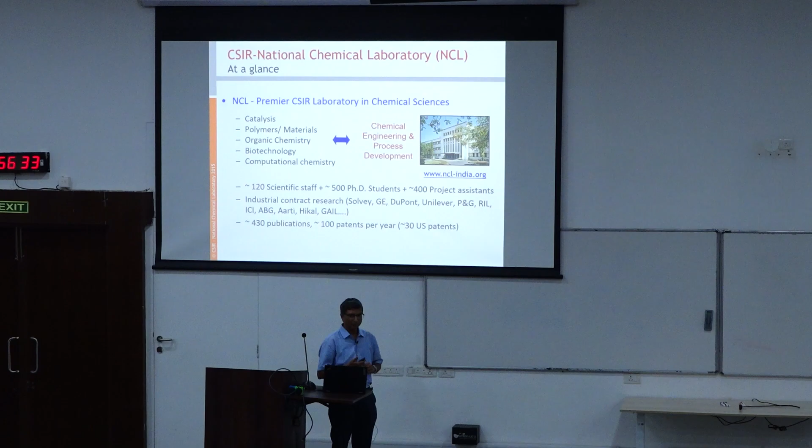Size does not matter. So, we publish a lot, file a lot of patents also. So, there are a lot of people who do a lot of basic research and a lot of people who do a lot of applied research. It is a lab where things are balanced properly, because many times you just can't run around and repeat the same reactions again and again, but you would also like to spend some good time on why it is happening, why you are not getting the required kind of results. So, there are a set of people who just do that part, they do not get into application, but they know why some reactions happen that way.

So, in our group we basically do a lot of training programs, and one major part is on continuous processes. Now, why continuous? It is easy because our digestive system is continuous, we think continuously. When we want to travel from any part in Ahmedabad to any other part, we do not want to have traffic jams, we do not want to have speed breakers, we do not want to have signals, we would like to travel continuously, but that is the case with every city. Fortunately, our heart works continuously, kidney works continuously, it is all continuous because it is efficient.

And so, when so many examples are around, then why should chemical synthesis also not happen in continuous mode? It should be a continuous process. Not everything need be continuous, but wherever required it has to be continuous. There are a lot of advantages of that, I will come to those points a little later. And it is not that we do not know continuous things, we eat lots of cookies, breads, biscuits, everything which is manufactured in continuous mode. The assembly line in the automobile industry is continuous, pharma tableting happens continuously.

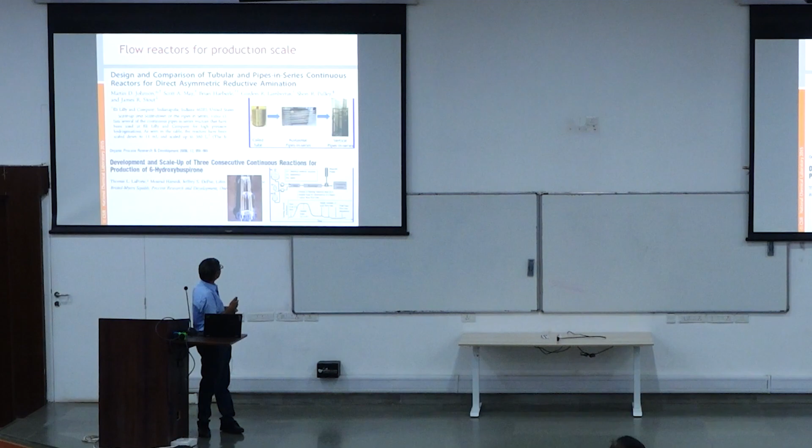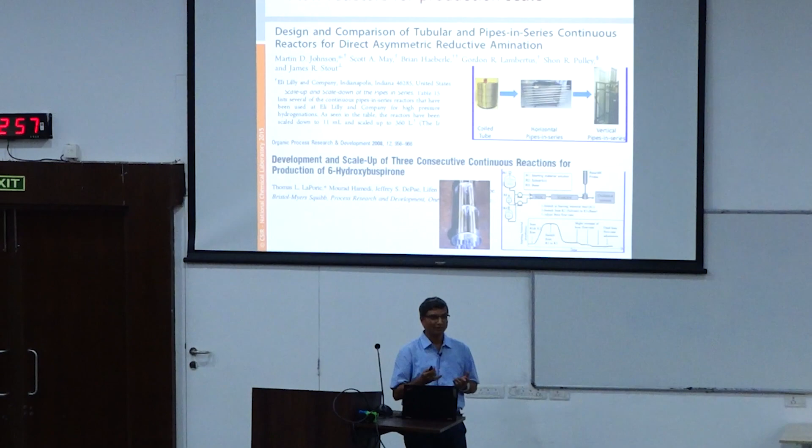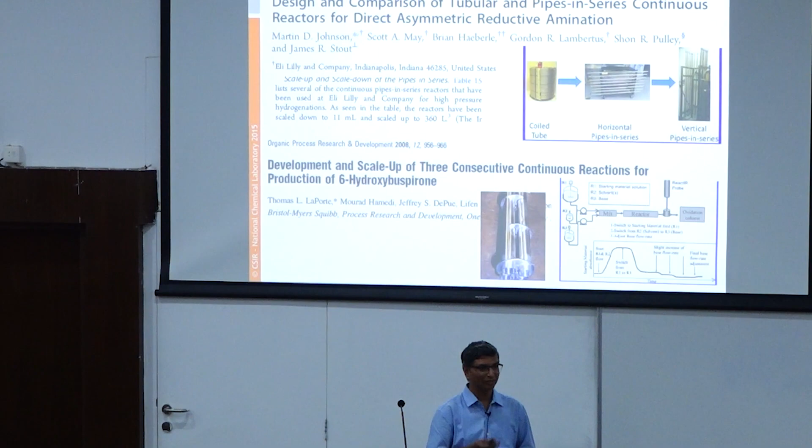So, many such successful examples have been shown, and many such things exist in the literature and at commercial scale, where people have gone to really large scale reactors, like reactors with a capacity close to 360 liter volume, and the reaction time is 3 minutes. So, every 3 minutes 360 liters is processed. So, imagine the throughput for the entire day, and that 360 liter reactor actually sits on this kind of a podium. It is a really compact one, but offers very high heat transfer area.

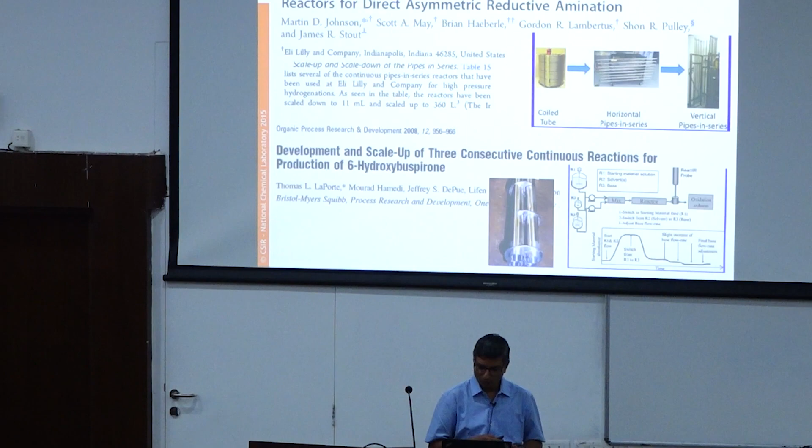So, over time, a lot of industries have gone into this, a lot of good publications came out, and after that the European chemical industries came out with a plan to transform the way they make chemicals in different segments, like R&D. They thought that by 2004 the R&D of almost all European chemical industries would have flow reactors, then screening would happen, then industry would adopt quickly, biotechnology transformations would happen, and then fine chemicals, energy production and mass chemicals. This was quite ambitious, because the entire timeline and roadmap was made by chemists without realizing the many engineering challenges they were going to face. Eventually it took quite some time, and probably they are still somewhere here.

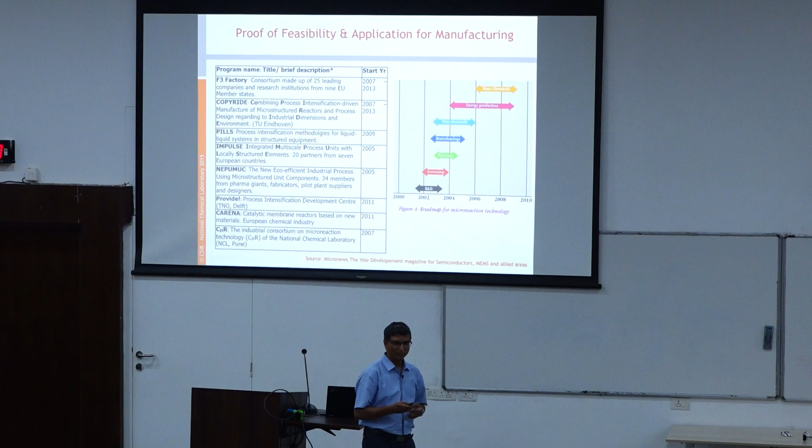This is happening in the US, energy production by companies like Velocys at very large scale. There is a company called Atmonia in Iceland; Atmonia stands for atmospheric ammonia. They do ammonia synthesis at atmospheric temperature and pressure, rather than the Haber-Bosch process, which is at 250 bar and very high temperature, almost 400 degrees centigrade. So, they use nitrogen from air and hydrogen from water at room temperature to make ammonia. It's all a continuous process.

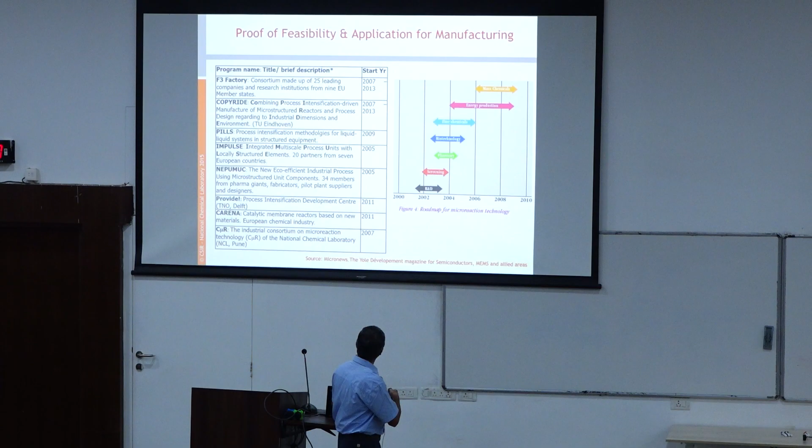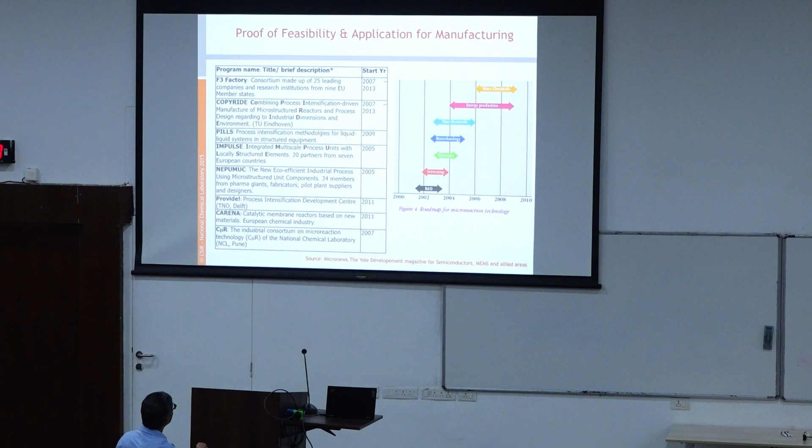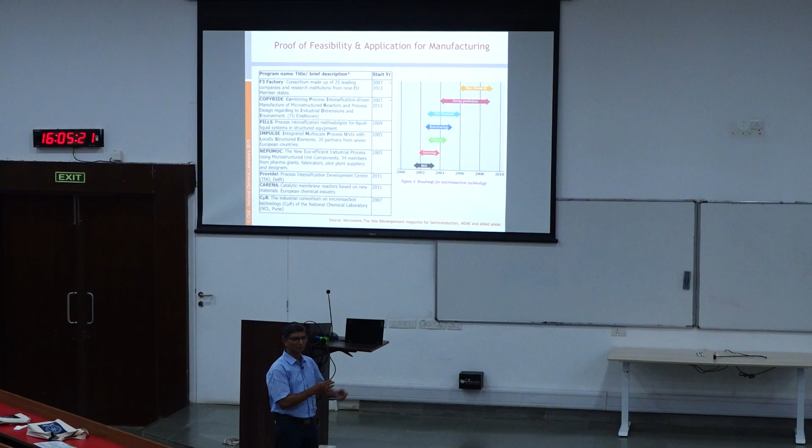Over a period of time, a lot of consortiums came out where the industries came together. It was not academia. Industries came together. For example, in this particular case, 34 members from pharma industries in France and some European companies came together to develop eco-friendly industrial processes. Similar is the case with IMPULSE, integrated multi-scale process units with locally structured elements, 20 partners from 7 European countries. So, industries came together to solve common problems, rather than one company solving a problem and keeping it to themselves, because, at least in India, people hop. So, you lose the process that way.

So, rather than that, the way pharma companies did, many years back there was a big program called LAZORE, L-A-Z-O-R-E. Each letter stands for one company, like L for Lupin, A for Aurobindo, Z for Zydus. So, these companies came together to solve one single problem of solvent recovery.

Because in pharma, solvents are used in large quantities in the end-stage chromatographic applications. They wanted to recover as much as possible. So they realized that there is no point in each of them individually spending a lot of time and energy on that. They all came together to form a consortium and solve the problem once and for all.

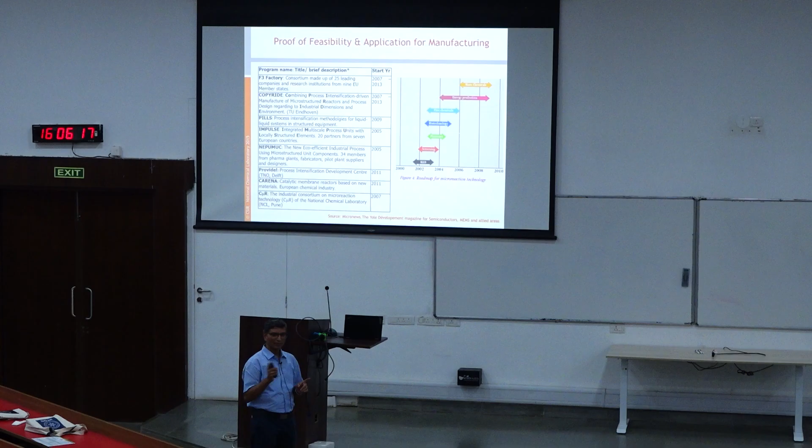In 4 years, there were 6 major solvents which they were using. This consortium solved the problem to recover all the solvents to 96% in one single go, and they informed everybody, and there was a technology partner who made sure that the plants were put in each of these locations. So I think that is what needs to be done. People do trust each other, and we also need to do the same thing.

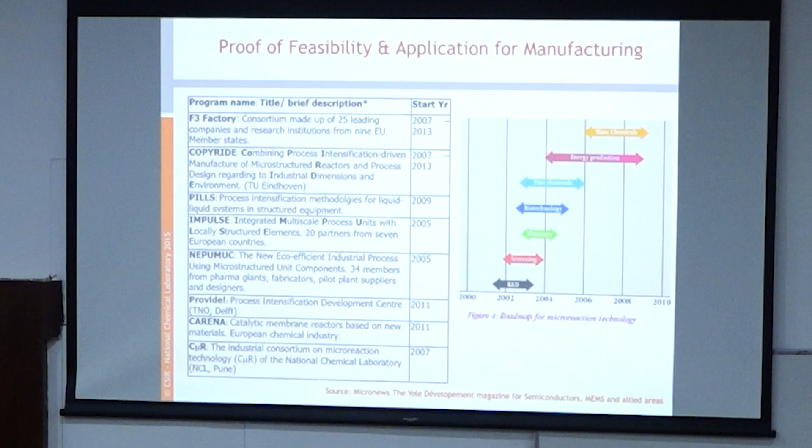In batch it does not matter, because conventionally a chemist will develop a batch protocol, hand it over to a tech transfer team who will try to follow exactly the same protocol without thinking much about it, and then it will be implemented at large scale.

But when you have processes where the reaction rates get enhanced significantly, like imagine you are doing a reaction at minus 40 degrees centigrade for 8 hours in a reactor which is 1 meter cube or 1 KL. Instead of that, if you do the same reaction at 0 degrees centigrade, what is going to happen? As per reaction kinetics, with every 10 degree increase, the reaction rate doubles.

So at minus 40 it needed 8 hours, at minus 30 it will need 4 hours, minus 20 2 hours, minus 10 1 hour, 0 degrees 30 minutes, and you keep going to 20 degrees and so on, you will come to a few minutes. But what is important here is that as the reaction time decreases, the amount of heat that gets generated is not going to decrease, it is going to remain the same.

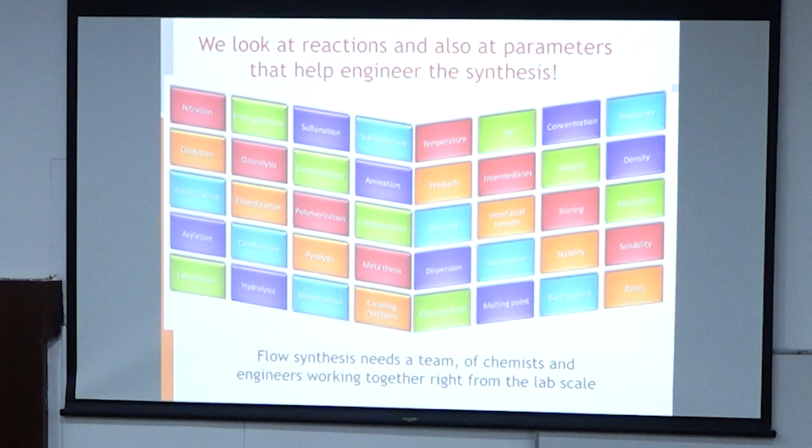So typically when we do a 5-day training course at NCL, we have a long, elaborate program. Day 1 is basics of reaction engineering and multiphase flow, because a lot of industries do gas-liquid and liquid-liquid reactions. Every day the morning half goes in lectures, and the second half goes in doing experiments based on what was covered in the first half.

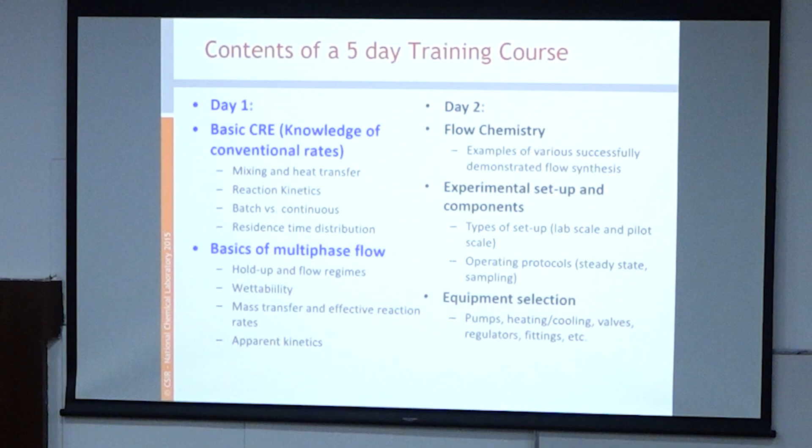Then the second day is on flow chemistry, various successful examples from the literature, and what kind of experimental setup is required for liquid-liquid reactions and gas-liquid-solid reactions. In the second half, people are given all the components required to assemble the setup. So each team assembles their own setup to carry out their own reactions. That is the way the second day goes.

The next day we cover a session on batch to continuous transformation. What should be the approach? How do you check the mass balance, energy balance, multiple case studies, what to avoid, and so on. And then we go for scale up. How do you scale this up? And in the afternoon they actually start doing the reactions. We will pick up one case, either nitration, diazotization, hydrogenation, or oxidation.

The fourth day is continuous separation, purification, and different special topics in chemistry. They continue to do more reactions in the second half. The fifth day is more like questions and answers. And since each team builds their own setup, when the setup does not work, they themselves know why it has not worked, because they assembled it, so they have to start from scratch again.

So this goes on for 5 days, and at the end of the 5th day we are sure, and they are also sure, that given any reaction they will be able to do it in their labs. And we give the setups to them so that they can carry them back, because one of the common excuses is "हमारे पास कुछ नहीं है" when they go back and priorities change, but then that does not happen.

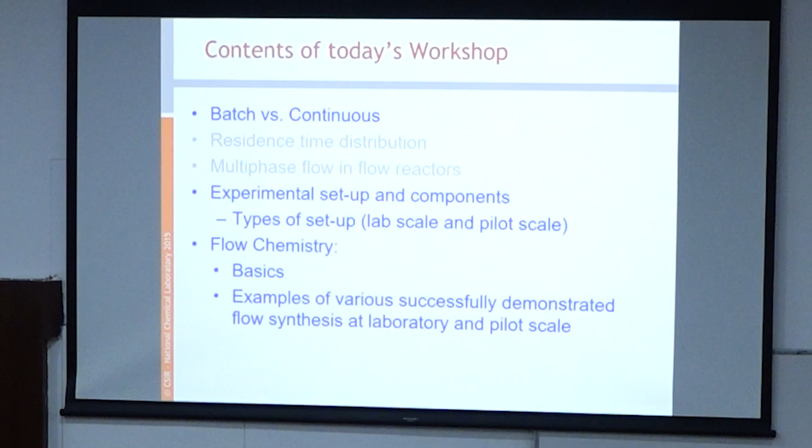We tell them what all they need at the end. What I am going to do today, I cannot conduct that whole thing. I am just going to give some information on batch versus continuous, why it is required, and then I will go back straight to this flow chemistry basics and some successful case studies. That will be better, and then my colleague Dr. Anil will cover some hydrogenations.

Okay, so before I begin, long time back in 2012 in OPRD there was one editorial by Professor Trevor Laird, who basically said that although a lot of APIs for the generic drugs are cheaper, 78% of them are actually manufactured outside India and China. Okay, 78% of the important ingredients for APIs are actually manufactured in these countries, UK, Germany, Switzerland, Italy, Canada, etc., where the labor and cost overheads are high. They can still compete on the cost because those syntheses are complex.

But when overheads and the labor cost in India and China also increase, will we be able to make even that remaining 22%? That is the question he asked. And then he says that only those who are the most innovative and have the most highly qualified and well trained chemists and engineers will be able to survive as the market demands lower and lower prices for generic drugs. So, it means that your prices will keep on falling; unless your technologies become better and better, you will not be able to meet the requirements at all.

And so he said that innovative low volume continuous processes might also be applicable in the generics field. Generics means the large volume pharma drug molecules. When he talks about that, it means that even for the other fine and specialty chemicals it is equally applicable. So, we have trained people from almost 60 different industries over a period of time; we are closely associated with many industries, we have trained their people indirectly, directly and so on. This is still a small subset of this thing.

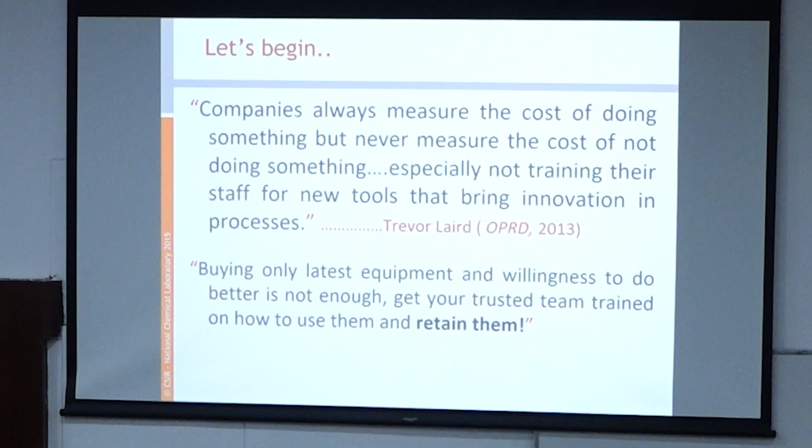Get your trusted team trained on how to use them and also retain them, because many times what we have observed, people who get trained on something very specific like to immediately write in their LinkedIn account that now I know this thing, and then they immediately jump to somewhere else, quite likely. So, for all the industry owners, this part is very important. How do you retain them? So, make a loyal team in your own groups and so on. So, I will just close the first part. This was just the introductory thing. I will stop this.

Around 15 to 20 minutes I will take this second part, and then is there a break in between or there is no break, right? Okay. You really want them to sit continuously for a long time? We will see. Okay, all right, fine.

Okay. So, let me begin with some basics of flow reactors, because I know that many of you have attended many conferences, you have seen the flow reactors in ACHEMA and CPHI kind of exhibitions. You also directly use some of these things, but since Professor Chinmay told me to have a basic training course kind of thing, I thought that this might be a very useful thing. I might skip some part of it without getting into too many details.

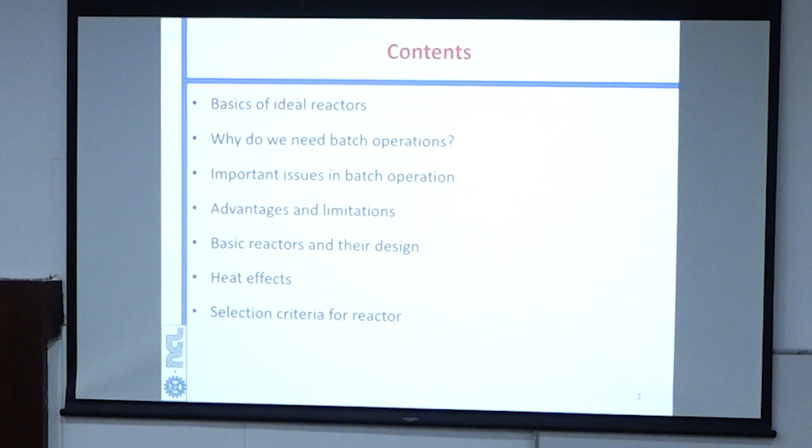Okay, what I will cover: basics of ideal reactors, why do we need batch operations, important issues in the batch operations, advantages, limitations, and then basic reactor design and why we should go for a continuous reactor. So, typically the batch reactors, I do not need to tell you, we do all cooking at our home in batch mode, whether we are making a cup of tea or any curry or anything, it is all batch.

And every day we know that the tea does not taste the same, but we forget that, we do not compare. But if we really have some kind of way by which we monitor the taste of a tea every day, you will get a wide distribution over a month almost every time you do it.

So, batch reactors are stirred tanks sufficiently large to handle full inventory of the complete batch cycle, and people typically want to produce as much as possible in a single reactor. Primary purpose is that in one single go you produce a large batch, so that your utility cycles also remain intact as per your requirement, and your manpower should match with your 1 or 2 or 3 shifts at the most. There are a lot of supply chain issues also related to that.

You also want to make sure that it is not just the reactor, but further separation, maybe distillation, filtration, washing, etc., are all coupled with each other. So, time cycles of each are set such that your batch time should match with what you really want, and that is a good thing. In general, industry has practiced and optimized that.

Continuous reactors are generally smaller than batch reactors, and they handle the product as a flowing stream. So, whether it is a stirred tank reactor where feed continuously comes, it is stirred, and the product comes out. Basically here the temperature is maintained at a given value, and you monitor that, because depending on that the reaction rate will be decided. In a plug flow reactor, it is like a tubular reactor, feed comes in and it flows, and at the outlet you get the product.

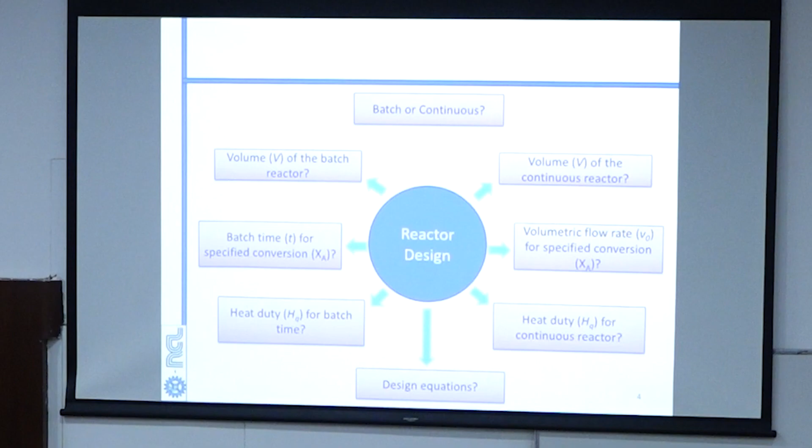So, with time the heat duty continues to change, while the continuous reactor is a steady state reactor, so nothing changes. So, to make a process or a reactor continuous, you need to know the heat of reaction. Irrespective of whether you want to operate a reactor in batch mode or continuous mode, heat of reaction is absolutely important, and then you use the design equations for that.

So, I do not need to say all these things because batch reactors are already known to you. Industry knows why you are using them, how you select the impellers and so on. So, I will just move on from this. This is one important part. Typically when chemical engineers study the design of a batch reactor in the undergrad and use the design equation, it is always about achieving a certain conversion in a given time, in a given volume and so on. But the economics of a batch reactor is very, very important.

So, assume that your reaction is just now over, and you have just emptied your reactor. This is an idle time in the reactor where you are washing the reactor, preparing for the next batch. Then the next is the preparation of the reactor. You are cleaning it from inside, using the air jet to remove everything from the reactor, checking utility temperature and so on. Then you are feeding one of the reactants and using utility to bring it to a certain temperature, and then you start adding the next reactant, either in semi-batch or batch mode, and the reaction starts happening.

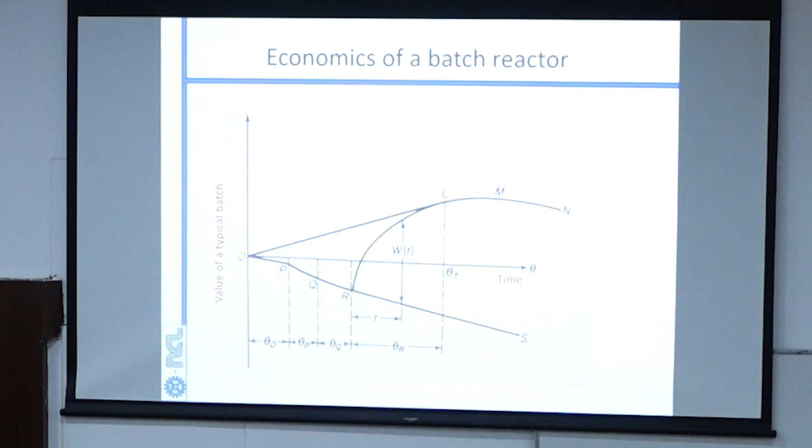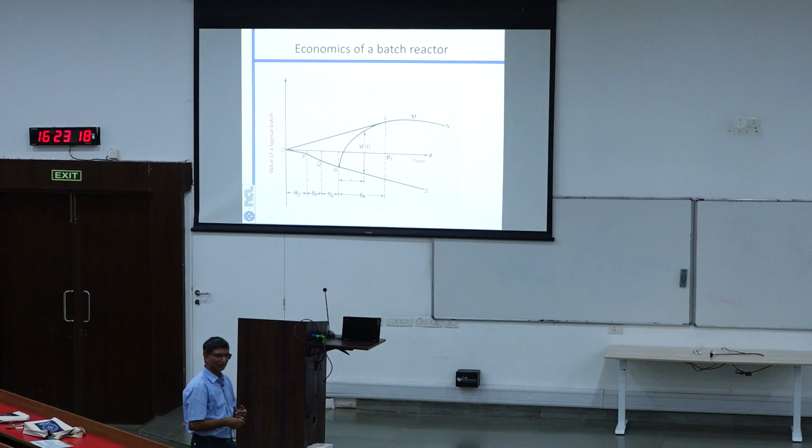Now, this particular line indicates how much money you are losing with time, because when it is idle and not being used, you are losing. It is like an aeroplane. When it is in the air, it earns money. When it is on the ground, it is not earning money. So when the batch is being prepared, the batch is empty, etc., you are not really earning. But as the reaction proceeds, you are earning money, and the time decides how fast you earn that money. The shorter the batch time, the faster you earn, and that depends entirely on the reaction kinetics. So anybody would like to reduce this time and this time also, so that you carry out as many batches as possible in a very short time.

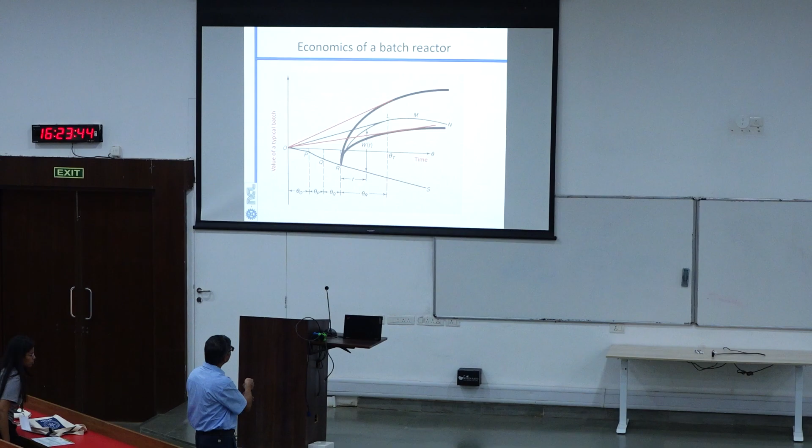So depending on your rate of reaction, because in a batch your heat transfer area is limited, you can't carry out a reaction very fast, it will have its own effects. It will generate side products, it will add a lot of cost to the separation and so on. So depending on how you carry out your reaction, the time where you should stop the reaction to get the maximum profit will be decided. Now all this is okay for a batch, people have been able to do this. But you can't really minimize this time; it is a huge amount of time you are losing every time between two batches.

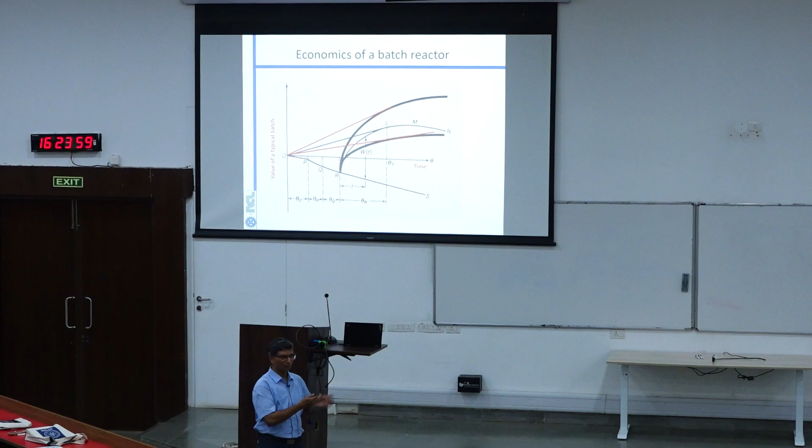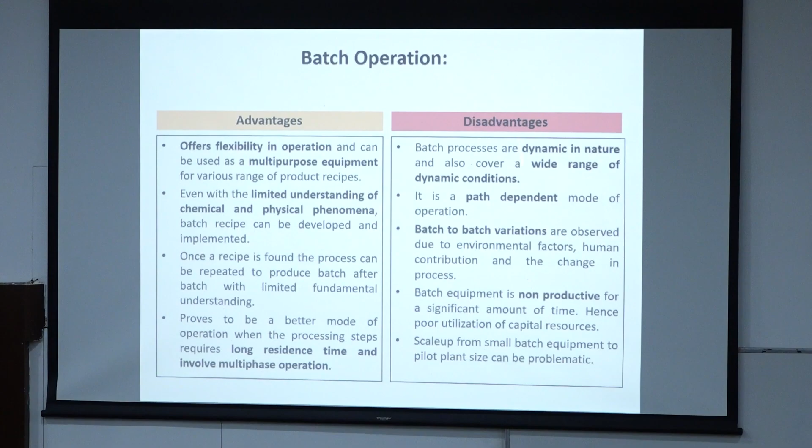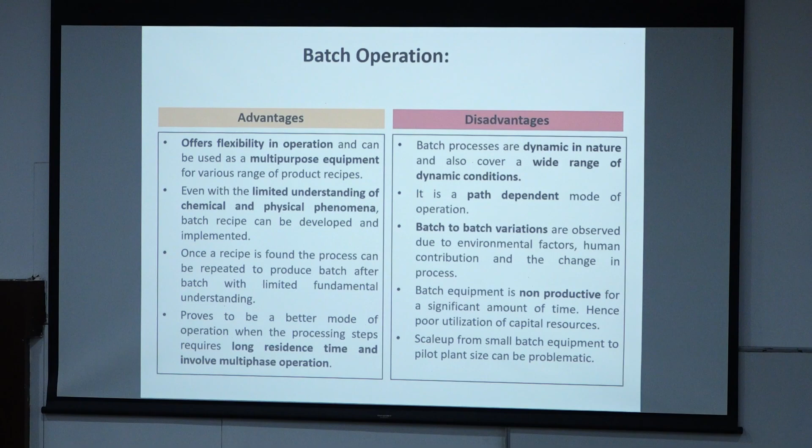Somebody might say, now I have 10 reactors, but the cycle has to be followed, you cannot bypass a cycle. There is some drain time, some preparation time, some cooking time, and then there is a reaction time. So you are losing time in general. So why do all these things? You better make it continuous. There are several advantages that you already know, and many disadvantages of batch reactors, but it is not that every reaction needs to be made only in continuous. There are several reasons for which batch is also necessary, and several reasons for which continuous has to be made. So how do you make that choice? That is what we will try to see.

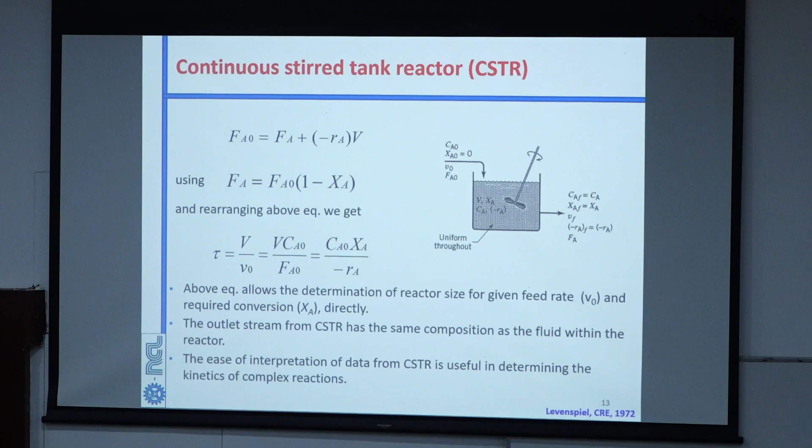So again CSTR, I will just skip some of these introductory parts. In a CSTR, as I told, the reactants enter and mix with the reaction mass; because they get diluted, the reaction rates are lower compared to a typical batch reaction, so it takes much longer to complete the reaction. To get the same reaction time as in a batch, it is necessary to have multiple CSTRs in series. If you have 4, 5, 6 CSTRs in series, this effect can be eliminated, so you get exactly the same time as in batch but still make it continuous. And then plug flow reactors: the reactant enters, product comes out, and what you manage is the temperature and good mixing. Depending on whether it is a liquid-liquid or gas-liquid reaction, you need the internal arrangements made in the reactor accordingly.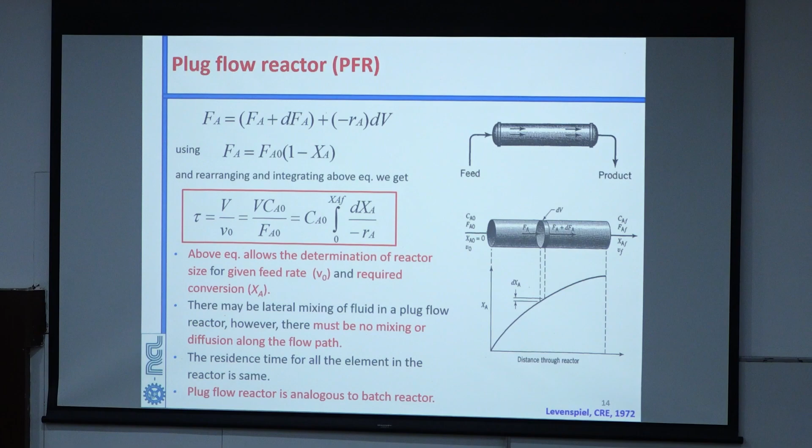Let me just skip this.

So when you do any kind of exothermic reaction, typically if you start the reaction at around 27 degrees centigrade feed temperature, and if you do a batch, suddenly the reaction temperature will rise to more than 90 degrees centigrade, because it's an exothermic reaction and you added both together. The reactants will react and the heat will come out. So within 1 minute it reaches close to 90 to 93%. It may go to completion also, but not in the desired manner. It will generate a lot of byproducts as well.

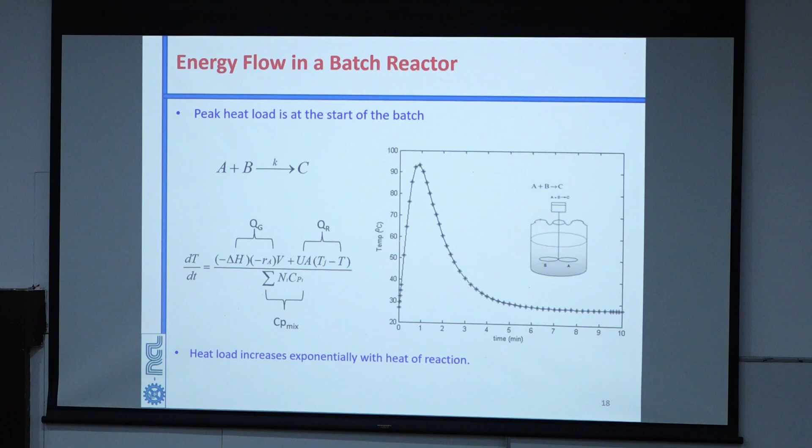But if you do a slow addition in the semi batch mode, which is a typical industrial practice, where you slowly add one of the reactants, then you go from 27 degrees to as much as 37 degrees centigrade in 10 minutes, and then slowly it will come to a lower temperature and the reaction will go to completion. In the previous case the reaction got over in about 5 minutes, but with a lot of byproducts. In this case it will take 30 minutes and you may get the desired product.

The only thing is that, to make sure the reaction temperature does not rise beyond this, you have to control time as well as temperature. So, operational cost increases.

In place of that, when you use a CSTR with proper configuration of the heating and cooling systems etc., it is possible to... let me skip this, sorry, I think I skipped one slide. Let me tell you one thing.

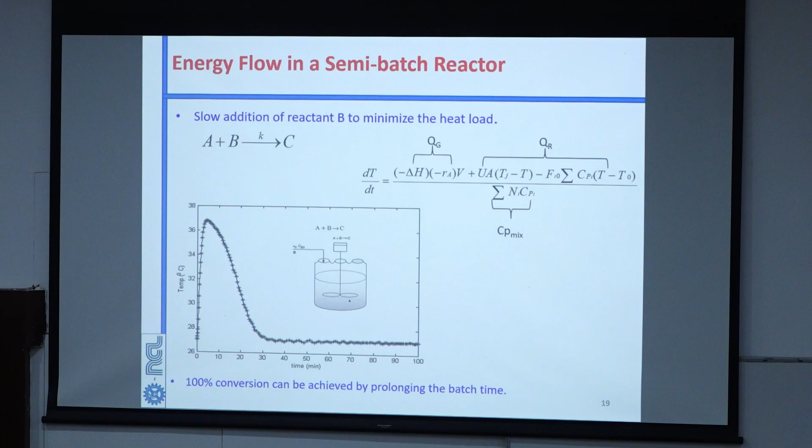If I do a CSTR, what will happen? You will have 3-4 CSTRs in series. Reactants together enter this reactor, the outlet goes to the next one, then the next one. The temperature can be maintained at the required 30, 35, 50, 55, whatever is required, and you still get what you want. So you are able to control the reaction temperature properly. Only thing is that your volumes will increase because your heat is getting distributed. You are not doing it at one location, but adding the reaction mass at different locations.

Let me go to this part here. Now, comparison between a CSTR and plug flow reactor. This is something very fundamental. Concentration in a CSTR is uniform throughout because you are stirring the entire mass, so the reaction rate is similar everywhere. On the other hand, in a plug flow reactor, the concentration changes along the length of the reactor because initially at the inlet the concentration is very high.

As the reactants move, the concentration decreases, so your rate of heat generation also decreases, and your product concentration increases. For a CSTR, concentration in the reactor is the same as the outlet. In a plug flow reactor, high concentration at the inlet, low concentration at the outlet. In the CSTR the rate is uniform in the entire reactor; in the plug flow reactor the rate changes with location.

In the CSTR the heat duty, the rate at which heat is generated, is uniform in the reactor. In the plug flow reactor, the heat duty decreases along the length because more heat is generated at the inlet where concentration is high, and it decreases toward the end. So whenever you design a reactor, whether CSTR or plug flow reactor, the most important thing required is reaction kinetics, which nobody measures.

I have rarely seen any industry measuring reaction kinetics, finding the rate constant and doing the design, except for some pharma and some fine and specialty chemicals for very large scale manufacturing. Otherwise, nobody does; you replicate what is successful in the batch at the lab scale.

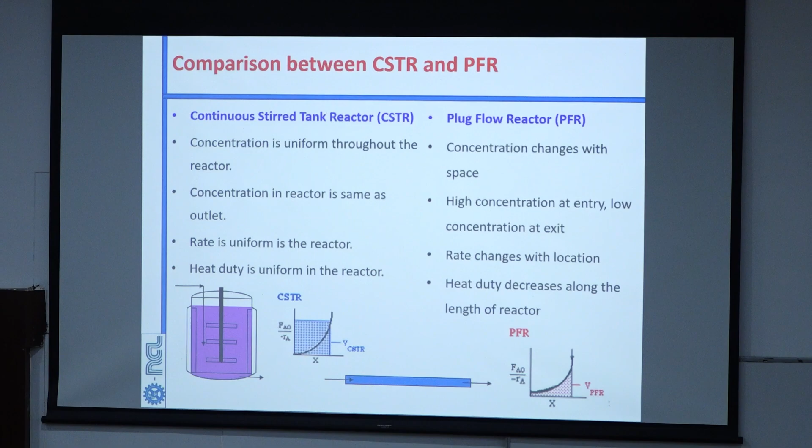So, there are a few specific advantages and disadvantages of both. From an operation point of view, in batch the concentration of materials changes over time. In a continuous reactor, at any point of time you take a sample from a CSTR, it is always the same, or in a plug flow reactor, right? From a given location you take out a sample, it is always the same because of steady state. Type of material: batch can handle all kinds of materials. For continuous reactors, it is easier for material which flows.

Then type of reactions: in batch, you have to slow down the reaction. You can't afford to do heavily exothermic reactions in a batch. In continuous reactors, due to small volume, fast exothermic reactions can be handled. Mixing: due to large volume, mixing throughout the vessel is very poor, because you need to have the right combination of impellers. That is also one more thing.

Typically in industries, I have seen in one industry when I was visiting, they had shut down because some audit was going to happen after 3 weeks. So, they were preparing for the audit, cleaning all the reactors from inside. They said, okay, we will show you our large reactor. They had a reactor with an aspect ratio of 4, so the height is 4 times the diameter. They said, we will show you how efficiently we are doing the mixing. It was like a 2 meter diameter and 8 meter height reactor.

So, we went up the stairs and I saw they had 13 impellers inside the reactor. There was no sequence of impellers, there was nothing. So, I asked them, why do you need this? No, you put more impellers, mixing is better. Then I asked them, what is the reason behind this combination?

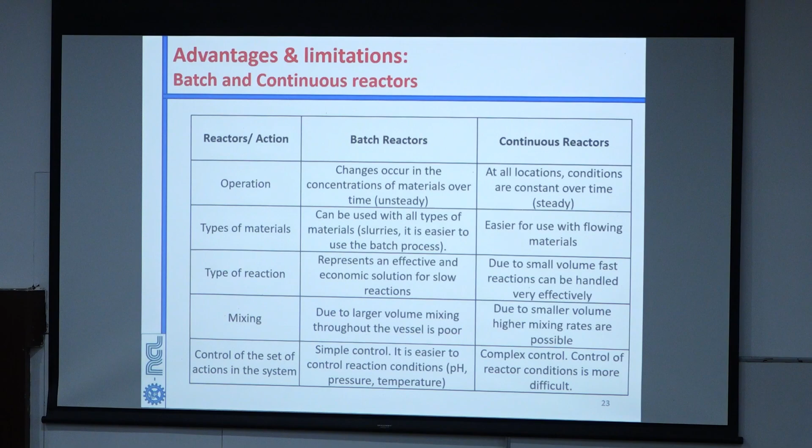So it becomes a little complex, but that investment is worth it, because once it starts that way, you do not need to stop the reactor. So long as you keep giving the same feed, it will always keep giving the same product. From a product point of view, in batch, extraction of material is only after the reaction. Here, continuous extraction of material is possible. Batch is preferable for production in small quantities. For large scale production as well as small, with efficient reactors, you can even do continuous.

At the product development stage, you should always do a batch in the lab before you go for a continuous reaction, even at the lab scale. There are a lot of reasons for that. I will come to that point a little later when we develop the approach for doing any reaction. If a gas is evolving, if something is getting precipitated, if a solvent is evaporating because of the heat of reaction, because the volume is decreasing continuously, all these things can be monitored only when you are doing a batch. There is no point in doing a continuous reaction right in the beginning unless the reaction is extremely fast.

Yeah, this has already come. Let me just go ahead.

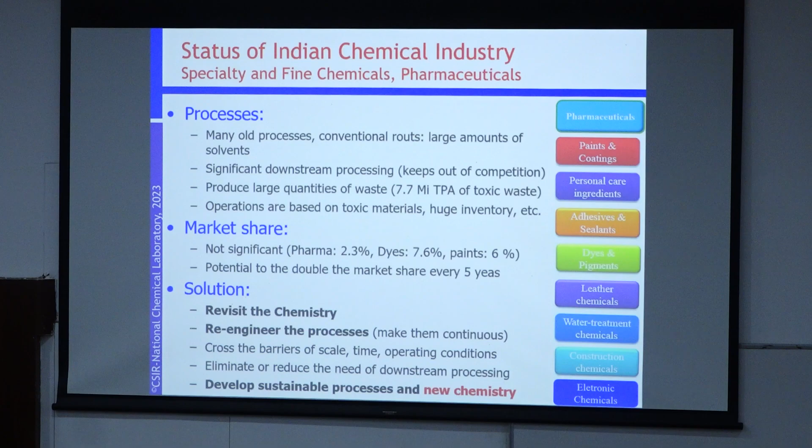For dyes you know your numbers, for pharma also they know the numbers, and many times the pollutants are not treated; they are left into the so-called ETPs and CETPs, and then they enter the normal water. Operations are based on toxic materials and huge inventory.

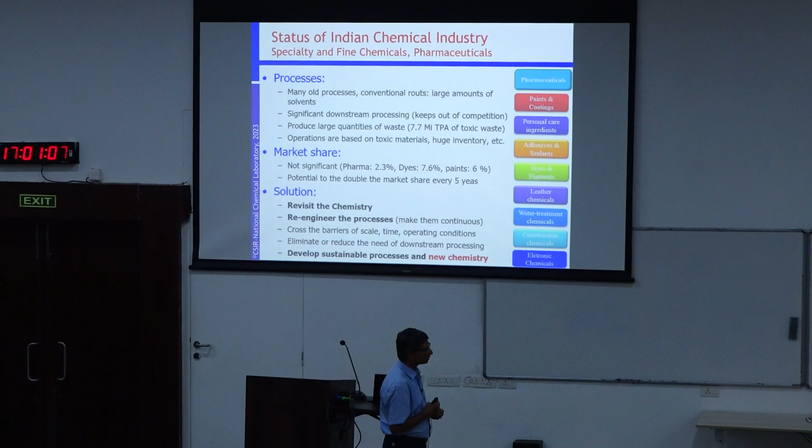If you go to areas, the pharma concentrated areas in Hyderabad, I had been to an industry sometime in July 2018. We were sitting somewhere and the rain was about to start, and I was talking to a very senior manager of a company. It was a small company, not a large company, it was a medium scale company. About the rain, he gave his person a big sheet of plastic and told

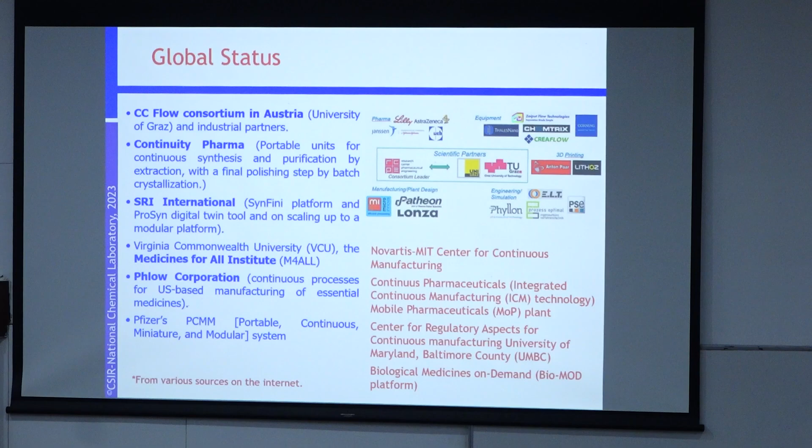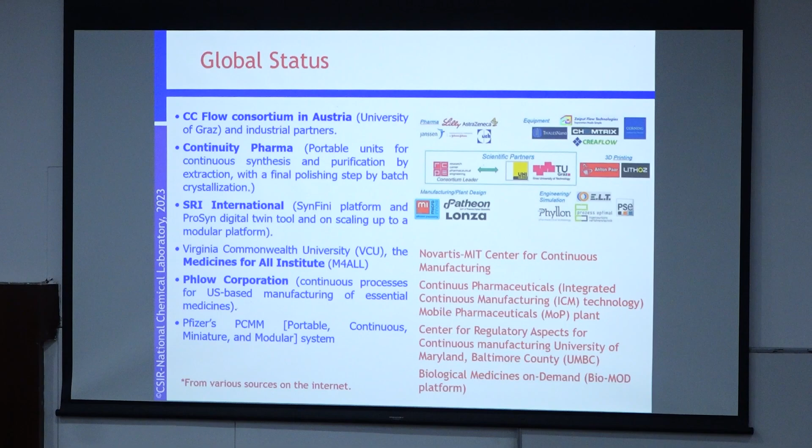Then there is SRI International, I do not know how many of you know this company. SRI International is the largest technology based company in the US, it remains a little isolated because they make everything from an ozone generator to missiles, deeply involved in almost everything which leads to technologies.

Then there is Virginia Commonwealth University, where there is an institute called Medicines for All Institute, M4All. So, it is an institute which the Bill and Melinda Gates Foundation and pharma companies have sponsored. Then there is a company called Phlow Corporation.

So, this is more like a PSU from the USA, a public sector unit kind of thing, largely funded by the government to make technologies for manufacturing generic chemicals, generic medicines in the US, so that their import dependence on India decreases. Last year they were given $490 million to develop technologies, and they have already started production for certain molecules. And then there are multiple companies who have their own consortium and so on, and this landscape is increasing.

Japan now has a new forum of 35 fine and specialty chemical industries who have specifically decided to come out with technologies that use chlorine, bromine, iodine and fluorine. They have decided that they are going to make it all continuous. So, 35 industries have come together; they do not want to have any imports from anywhere else.

And in India there are a few startups who are supporting the Indian industries, like Amar Equipment, Shavati Engineering, Technoforce, MaxSpeed, all kinds of people whom you will see in many exhibitions. And NCL has some work, IICT has started something, IIT Bombay also has many tools. As of now there are 250 Indian industries who are in this business of making batch processes into continuous processes.

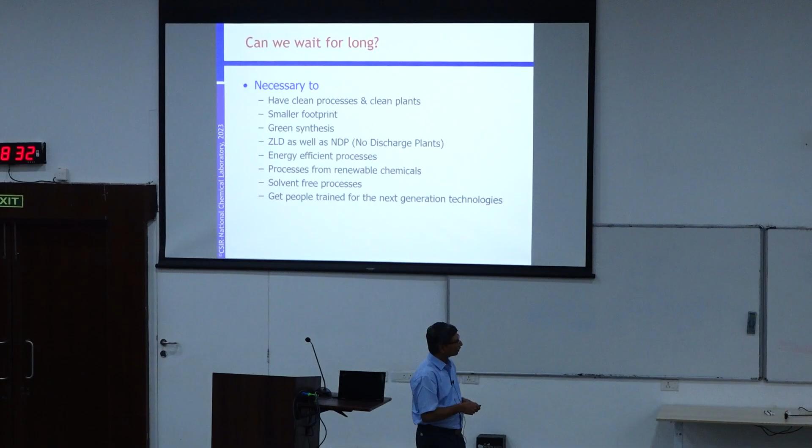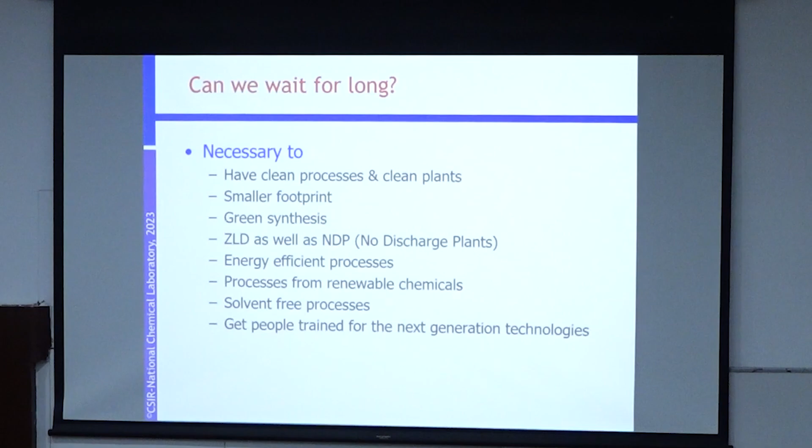So, smaller footprint, green synthesis, zero liquid discharge as well as no discharge plants, energy efficient processes, processes with renewable chemicals, solvent free processes, and getting people trained for next generation technologies. All these things are absolutely necessary; we can't wait for them. Necessity and urgency have come together and we can't bypass it, because if we do not do it now, somebody else will do it better, and then you can't say we will still try to adopt. No, the time has gone.

The moment Amogy announced that they are making atmospheric ammonia, it shook up the majority of ammonia manufacturers all over the world, because they have already talked to 67 fertilizer manufacturers worldwide that they will supply turnkey manufacturing plants at atmospheric conditions, and they have shown how cheap it is when you adopt their technologies. If that happens, imagine what will happen; RCF may survive because it is a PSU, other companies you don't know what will happen to them. The same will happen for all bulk chemicals; it is all going to change. Everybody is going to adopt electrochemistry.

So, now opportunities are in different spaces. This is where I want you to really focus. First is physical space. Physical space means process equipment, the backbone infrastructure of continuous plants, modular plants and skids. As of now, although I showed you many companies exist who are doing a little bit of their own continuous processes, continuous reactors, etc., we have not seen a Corning of India, or a UOP of India supplying a turnkey plant for any process that you say. It is not there.

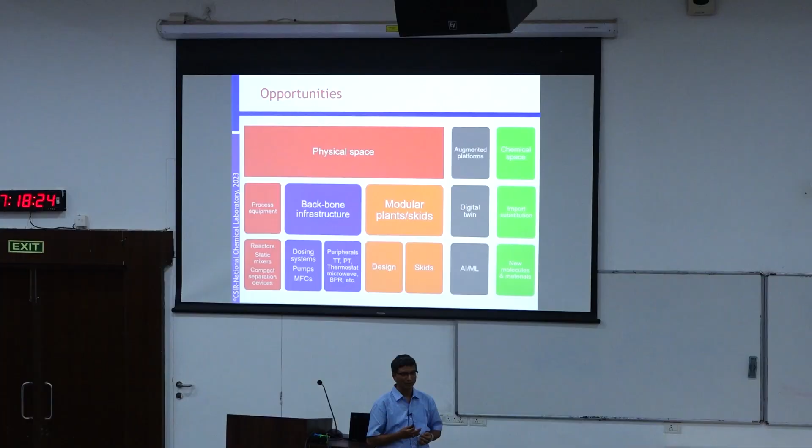And then new molecules and materials, we do not exist there, to be very frank with you, sorry for that, but when was the last time that we invented a new chemical or a new molecule for any application? We make formulations, companies like Pidilite to some extent, Asian Paints to some extent, and some agrochemical companies make formulations for their end products. But making a new molecule, new material, new surfactant, no, we have not seen that happening. So, this is where there is a huge opportunity.

If somebody gets into this, you need some good chemists and good engineers to work together, and that is because this is the land where 69% of the chemicals in India are made. Then we need to have a place which looks at these new molecules and new materials also, otherwise we will keep making the same thing again and again.

We generally classify the reactions in different ways, although there are many ways of classifying reactions based on the aromatic functional groups, the substitution that happens, the activity of the individual functional groups and so on. But as chemical engineers, we look at classification in this manner because it allows us to decide what should be the setup for the experiment when it is made continuous: exothermic reactions, shock sensitive reactions, like diazo is typically a shock sensitive reaction,

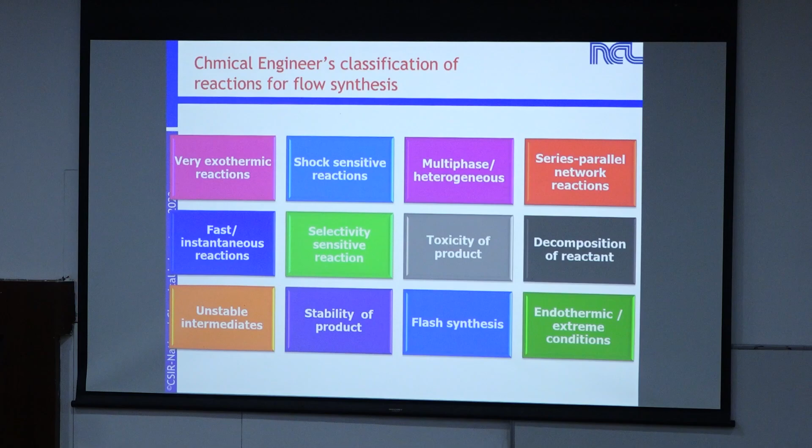multi-phase reactions where multiple immiscible phases come together because they do not mix with each other, series parallel networks of reactions, fast reactions, selectivity sensitive reactions where multiple products are possible, where toxicity of the product is a problem, where decomposition of the reactant is a problem, like in coupling, one of the reactants can decompose, and so on. So, I am going to show you two case studies here.

One is based on ozonolysis, which we have recently licensed to a company for large scale manufacturing of a product. Ozonolysis is an organic reaction where unsaturated bonds of alkenes and azo compounds are cleaved with ozone. In alkenes and alkynes, multiple carbon-carbon bonds are replaced by a carbonyl group. So, multiple possibilities exist, and using ozone is the cleanest and greenest way of carrying out such a reaction.

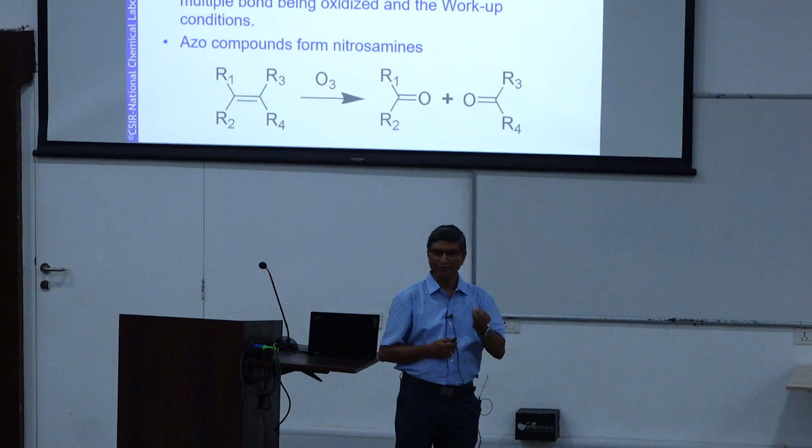Otherwise, you have to use hydrogen peroxide and some metal catalyst to carry out this reaction, and then eventually you also generate a lot of effluent. The outcome of the reaction depends on the type of multiple bonds being oxidized and the workup conditions.

So, if you carry out ozonolysis, the basic thing that ozonolysis does is it breaks a double bond in either a fatty acid, or if it is an aromatic acid where there is a double bond, it attacks the double bond. So, we developed a process for ozonolysis of fatty acid for producing a product called azelaic acid.

Azelaic acid is basically a product that is used in almost everything that goes on our skin. It's in all dermatological creams, even Boroline, collagen; it gives a kind of antifungal activity. We import 100%. There are many applications of azelaic acid.

Excuse me, can you please not record it? I request you not to.

Thanks. Okay. So, applications of azelaic acid are many, mainly which goes on the skin, but beyond that, there are 18 different grades of azelaic acid. The very poor grade goes as a plasticizer as well as a lubricant. The high grade is a pharma grade.

The lower grade has a price somewhere around 400 rupees per kilo. What goes in the pharma grade is 15,000 rupees per kilo. So, that is a wide range. And it is also used in sutures by companies like 3M and in medical devices, because it makes sure that locally the fungal actions don't happen immediately after the surgery.

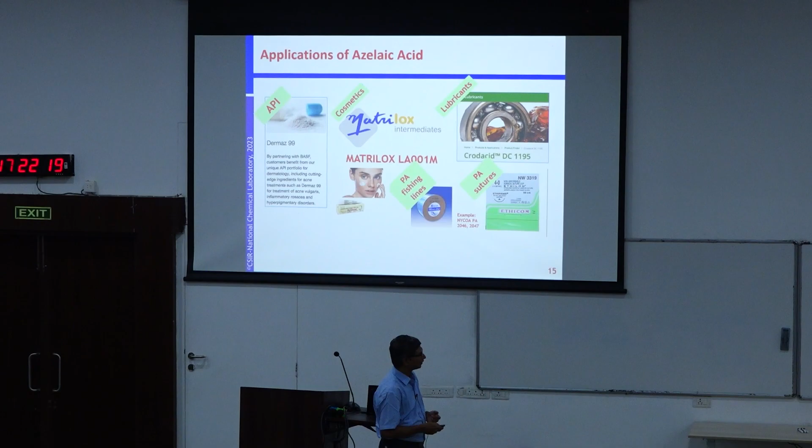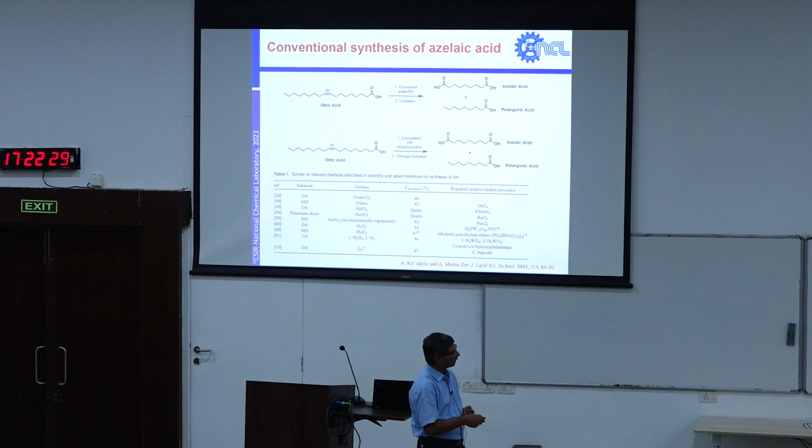The reaction is quite simple. You take oleic acid, and when you subject it to ozonolysis, this double bond breaks and it gives an aldehyde. That aldehyde undergoes further oxidation, and then you get this diacid called azelaic acid, and a monoacid called pelargonic acid. The cost of oleic acid is $1.5 per kg.

The cost of pelargonic acid is $4 per kg. The cost of azelaic acid is at least $8 per kg at the lowest grade. So, imagine $1.5 per kg is giving you two products which are $4 per kg and a minimum of $8 per kg. If you improve the purity of the azelaic acid or the pelargonic acid, the cost increases further. There are many methods for that.

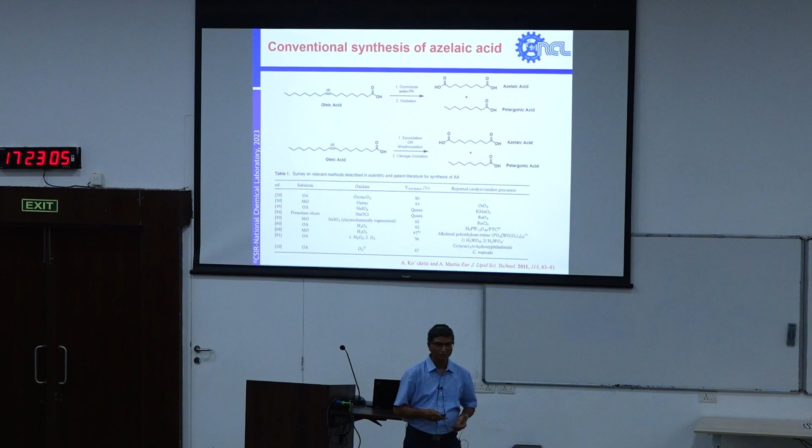People have used a lot of different methods, like ozonolysis in presence of tungstic acid and so on. We did a simpler reaction where you use ozone, then you mix it with an acetone-water system because you need to have a solvent there. You cannot carry out ozonolysis in water because it will quench immediately.

In the reported literature at industry scale, people do ozonolysis from 20 to 40 degrees and then increase the temperature to 70 to 80; 80% yield at ton scale has been proven, but it takes 14 hours. People use tungstic oxide and other catalysts with hydrogen peroxide at 130 degrees, 89% yield, shown at very small scale, and it takes around 4 hours.

Other options are like using gold oxide, gold coated on alumina and so on as catalyst; it takes 4 hours and 20 minutes. We do a neat ozonolysis; our reaction is at 100 gram scale, metal free, no catalyst, continuous, scalable, no additional oxidant, and it takes 5 seconds because ozone is active. You do not need such a long time like 4 hours.

Second thing, solubility of gases decreases as the temperature increases. So, if you go to higher temperatures like 70, 80, 130, it is not going to get dissolved anyway; it is going to get decomposed first. So, you do not need such a long time.

So, we developed this process at the lab scale and then took it from lab scale to pilot scale. Our conversion was 99.8%, and we got 98.5% pure azelaic acid. If I subject it to one more step of purification, it will cross 99.5%, that is the pharma grade. And we even made a pilot plant which was just 2 meters by 1.5 meters to make close to 2 kilograms of the final pure crystalline product per day.

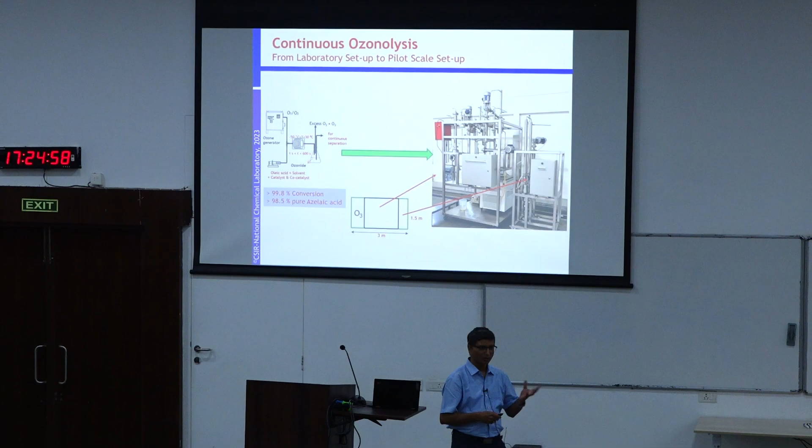We applied the same approach to different fatty acids having a double bond: elaidic acid, ricinoleic acid, petroselinic acid and erucic acid. We always produce similar kinds of products, and all of them have applications either in the veterinary industry or in the pharmaceutical industry.

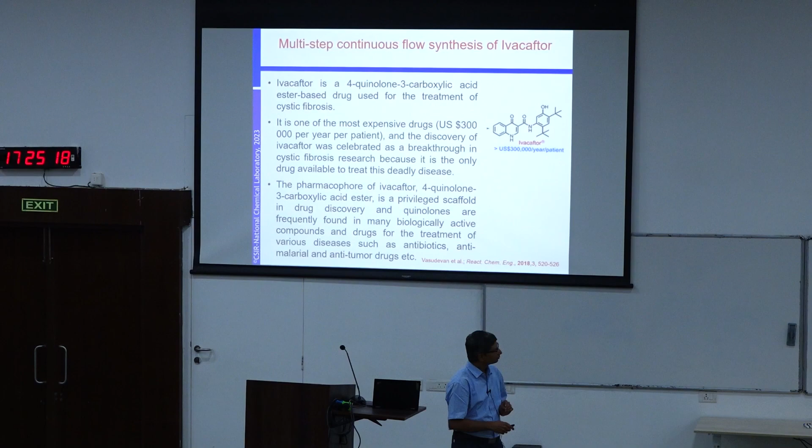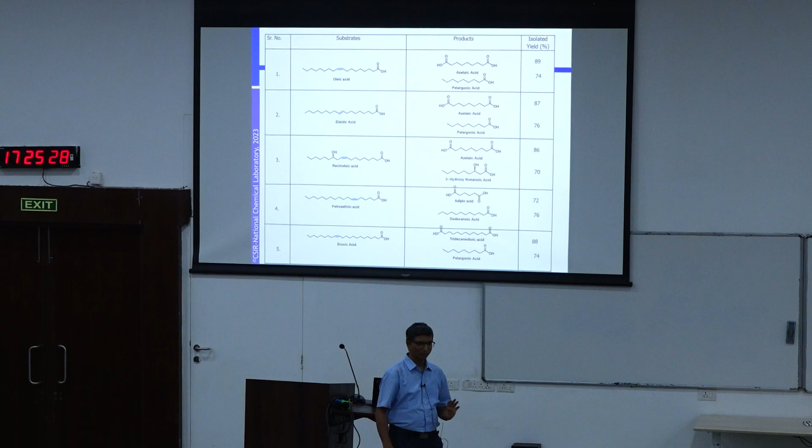So, basically it took us close to 2 years to develop this process, because ozonolysis is fast, but people are not willing to do ozonolysis because the ozonides have to be quenched. If you do not quench the ozonides, they catastrophically break on their own. So, if you have water in the reaction, even a small quantity, it basically quenches the ozonides. So there is no way ozonides will remain in the solution at any point of time after the reaction is over.

So, we ran the pilot plant for close to 500 hours discretely for different grades of fatty acids, because oleic acid also comes in different grades depending on the content of C18:1 plus C18:2. We produced a lot of quantities of different grades of azelaic acid. And soon there will be the first Indian manufacturer of azelaic acid that will start production. Similarly, there was another drug called ivacaftor.

I will move a little faster here. Let me just move again. Ozonolysis reaction. I will come to this point here.

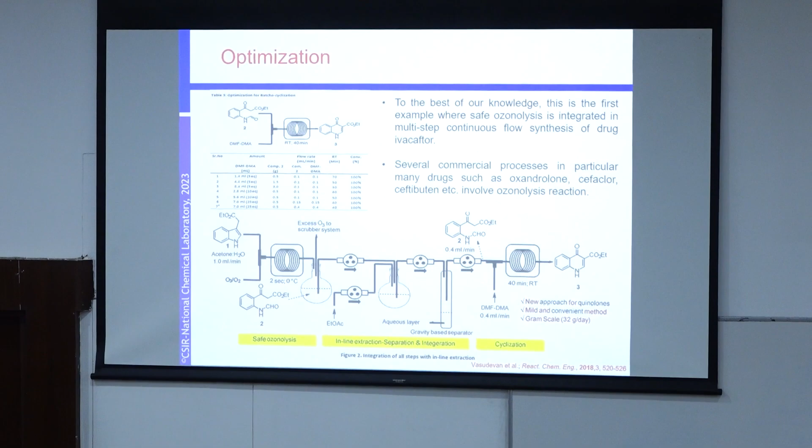This is the last step. This is the complete reaction step. The first step is ozonolysis here. In general, this particular step in batch takes 14 hours at minus 78 degrees centigrade. We do it at 0 degrees centigrade in 2 seconds. That is where the first thing happens. We got perfect selectivity, no further separation is required, and then 2 more steps of the reaction.

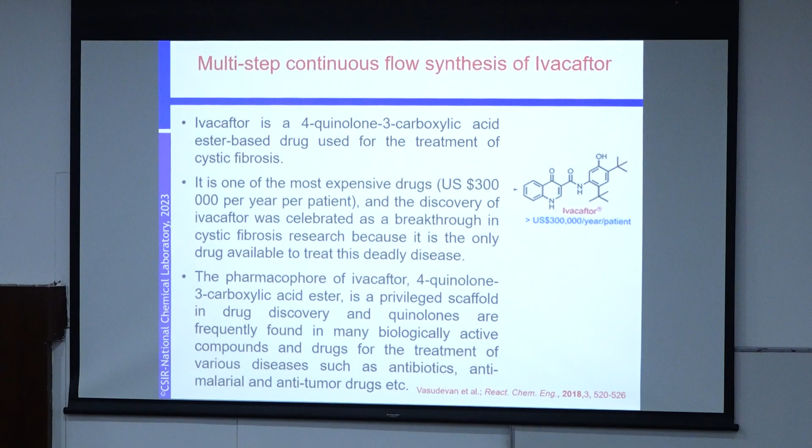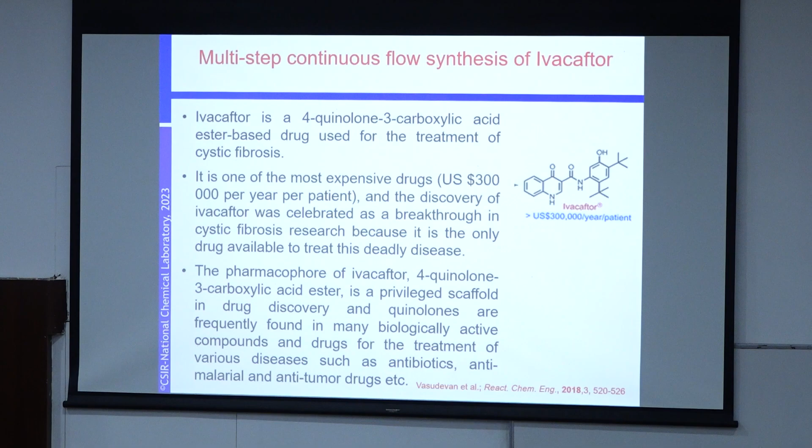Now, making this particular drug was very, very important, and I will tell you the reason. This is the world's most expensive drug, $300,000 per patient per year. That is the cost of the drug. And after COVID-19, there is cystic fibrosis. People who have cystic fibrosis, where the lungs become fibrous over a period of time, need this drug. After COVID, this number increased significantly, and so the demand for this drug also increased significantly. So, we now have a continuous process with a US patent granted and European patent granted for this particular drug molecule.

I will skip this case study here. I will need 5 more minutes. I will prefer to do that.

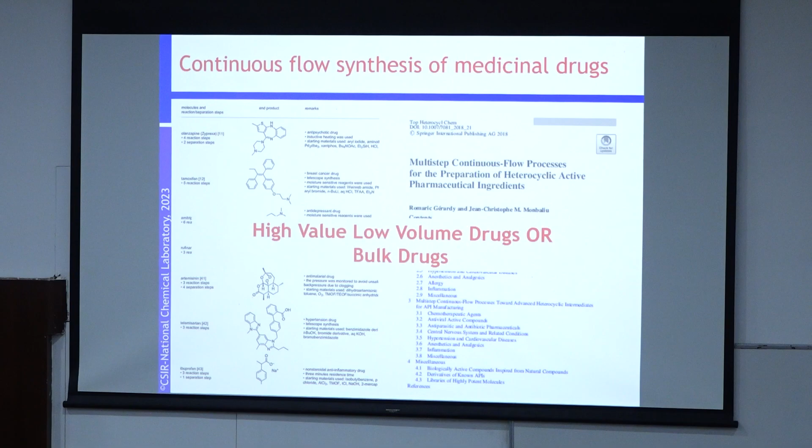Typically, when you see the literature, you always see a lot of complex molecules and medicinal drugs reported. People make all kinds of expensive drugs to show that they have done this for the first time. But there are high value, low volume drugs that are sold by innovator companies like Novartis, Pfizer, Amgen and so on. Nobody pays attention to the drugs that are required for the people who can't afford to buy drugs. That goes in the category called neglected tropical diseases. So, who will take care of those?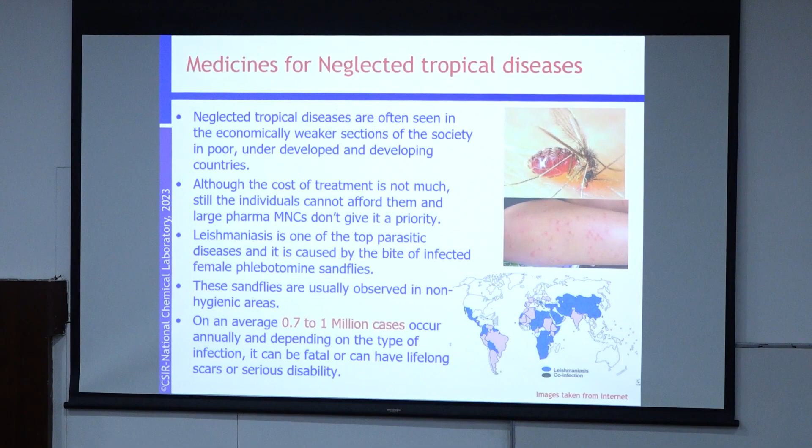There are philanthropic foundations like the Bill and Melinda Gates Foundation, Wellcome Trust, UNESCO, WHO; they sponsor all these things. One such disease is called leishmaniasis. It is a top parasitic disease caused by the bite of a sand fly. People who stay in unhygienic areas, when a sand fly bites them, it produces rashes all over the body, it is irreversible in a large number of cases, and many times it is fatal. Almost 0.7 to 1 million cases occur annually, and 40% of them do not survive after a couple of years, because the infection spreads.

This drug was invented by the London School of Hygiene and Tropical Medicine for anti-leishmanial effects. It is called miltefosine. Only one company in India makes it right now. It is in the WHO model list of essential medicines for developing countries, because developed countries do not need this.

And the synthesis is not very straightforward; it includes a lot of raw materials which are highly active and reactive. So the objective was to make a continuous process for miltefosine, the only oral drug, and develop an efficient synthesis process that gives significant cost reduction. And there are a lot of challenges. Every step forms solids, every step forms byproducts, reactants are highly reactive, and it is impossible to assume that you can make everything in one single go or a one-pot synthesis.

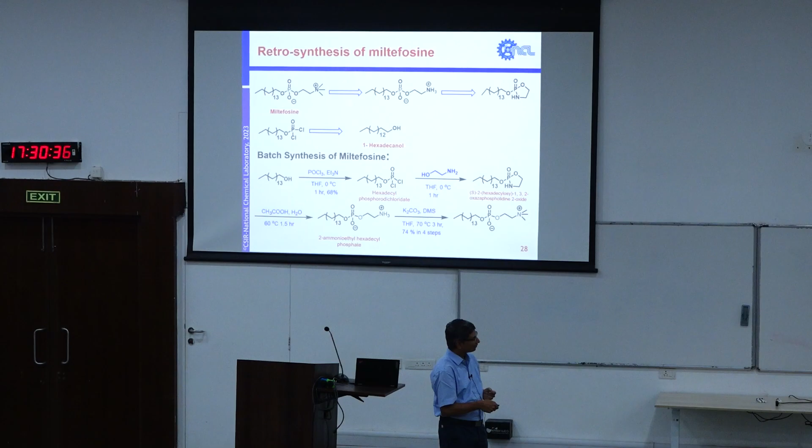Then the second step is also 1 hour at 0 degrees centigrade, the third step 60 degrees for 1.5 hours, again a lot of solvent, acetic acid is used. And then the fourth step is a solid-liquid reaction at 70 degrees centigrade, with THF under reflux for 3 hours. And when you do the reaction, with all the 4 steps put together, you get around 74% yield.

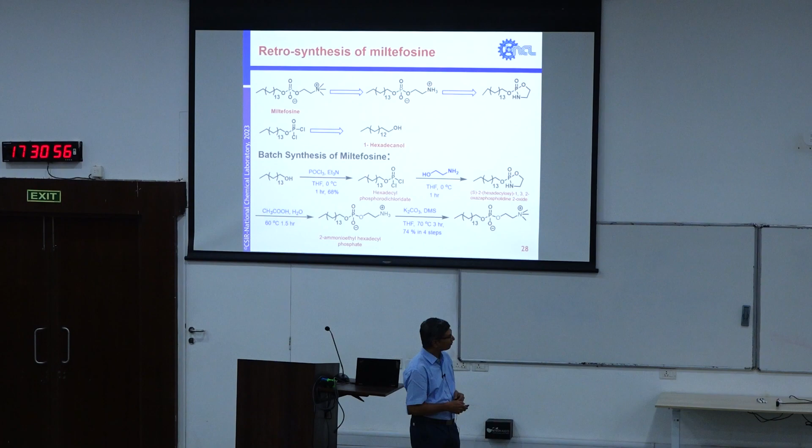We thought that this is an easy thing to do. We were confident that this will become easy. What we need is basically 6 pumps, 4 reactors for each reaction to happen, and maybe we will need some separation and all. And we planned, this was the on-paper plan, and it did not work.

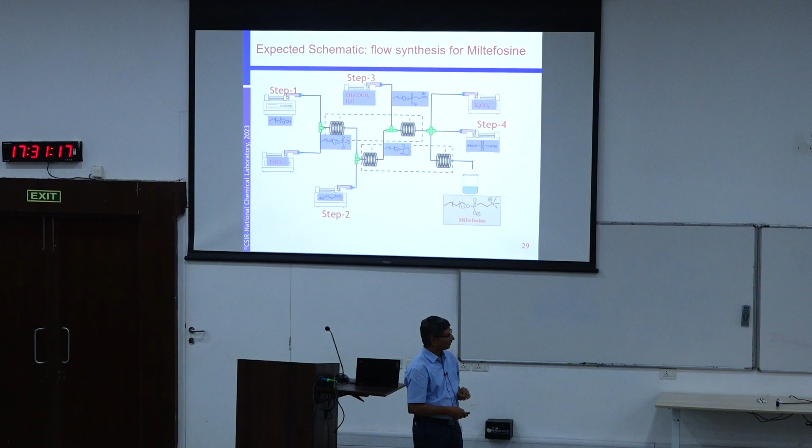We had to go back to each step, literally on each step we spent 2 months minimum, because every time you do the reaction, it will either clog the reactor or the reaction will be incomplete. So students had to struggle a lot. So eventually we could optimize the whole thing in continuous. I will not go through details.

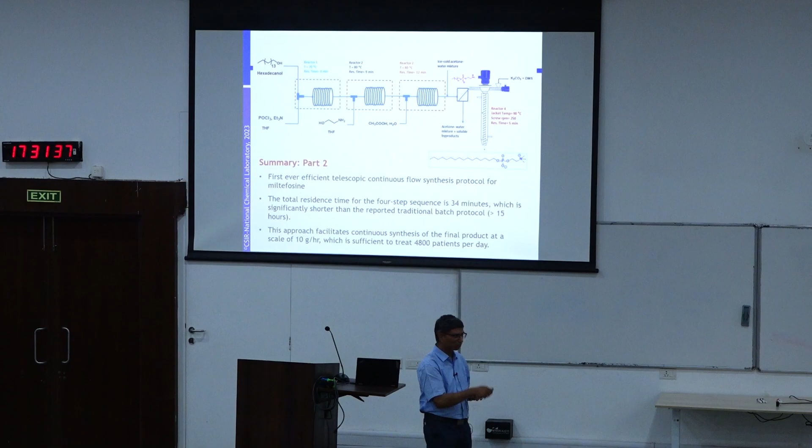We start with 1-hexadecanol and the POCl3, highly reactive, and triethylamine, and the first reaction we optimized in 8 minutes at 70 degrees centigrade, the second step in 9 minutes at 80 degrees centigrade, the third in 12 minutes at 80 degrees centigrade, and the fourth, the solid-liquid reaction, including a separation that must happen because otherwise the reactant gets quenched, happened in 5 minutes.

So this was the first ever telescopic continuous synthesis, telescopic because we are not separating anything, we are just continuously doing it. Total residence time of 34 minutes as compared to 15 hours in batch. We were able to make 10 grams of the pure product per hour in the lab using this particular setup. So what it shows is that reactions which are highly exothermic and sensitive can also be done in continuous mode.

Now coming to the interesting part that some of you may like to listen to, diazo chemistry. I will not go through much details. We have started a large program on reinventing the dyestuff industry. India has a large dyestuff industry which manufactures acid dyes, basic dyes, reactive dyes, azo dyes. We rarely have anybody who makes thermochromic dyes.

We have people who make fluorescent dyes. So there are a lot of different types of dyes people manufacture in large quantities, but they also produce a lot of effluent. They also use a lot of energy while doing these things, and the methods of manufacturing are still very, very old. So through this CRDTH, for which you all have come here, the effort is entirely to focus on the dyestuff industry.

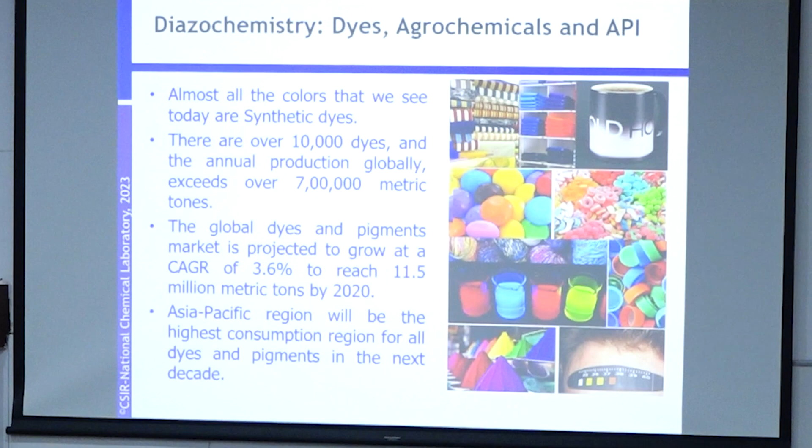We will be able to show you how you do your reaction with sulfuryl chloride without using solvent, for example, or how you make sure that you use stoichiometric quantities of the reactants to still get the same conversion, or how you do the reaction without using sodium nitrite. You still do the diazo, but without using sodium nitrite. So all these things we plan to do. I will just skip this whole thing.

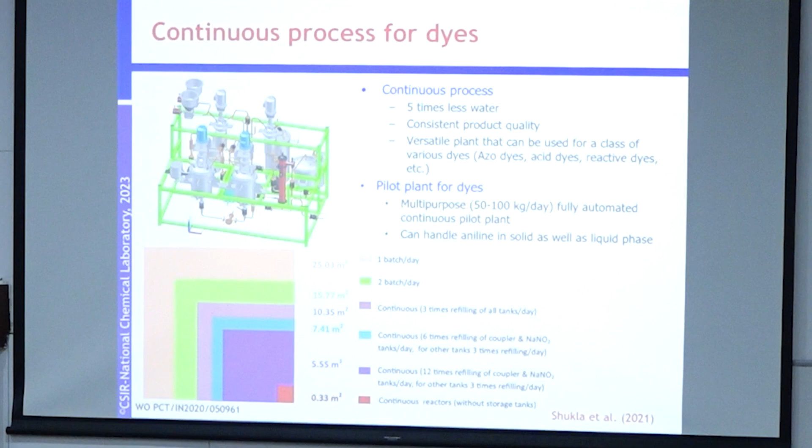We already started making many of these dyes, and we also put up a pilot plant there. So very soon our website will be ready, and the facility will be open for everybody. We will approach through GDMA and IDMA to sensitize the entire Indian dyestuff and colorant manufacturing industries to take a look at it and allow us to do it.

You de-risk your R&D, you do not need to take the risk, because we have already invested a huge amount of money in it. Allow us to do that so that you will be able to see what we are doing and how we want to do this. We have created some facilities over a period of time, and all of this will be available for the industries to use.

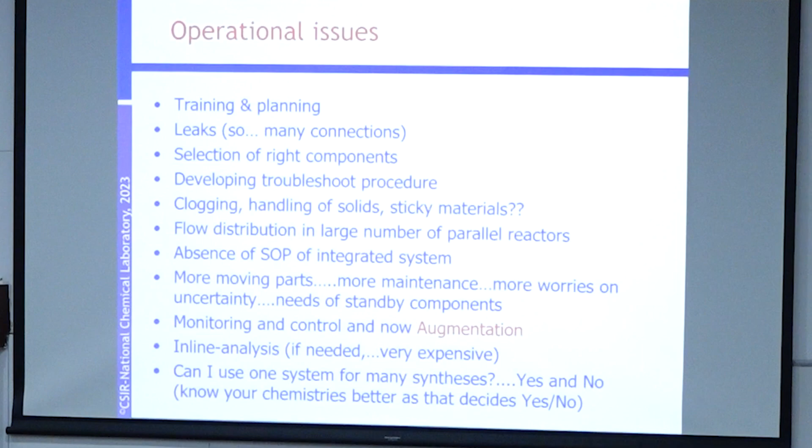Okay, I will not go through these because typically this will be required when we have a lot of people here, because many times we have design issues, technology absorption issues, then we have operational issues. This is a much bigger one, organizational issues. Like, I will not try first. Let somebody try. I don't want to be first.

I will see if somebody tries. I don't want to be first. I don't want to be too late, third, also. I want to be second. And so everybody wants to be second. There are very few industries who want to be first, and they really go ahead. So that's a syndrome. Then second is, why change?

I have already done the investment. What is the payback period for my new plant? I already have a plant, I have already made all the money from that. So I don't need to reinvest into something new. Will it work in India? It's very expensive. Why should I put in a new technology?

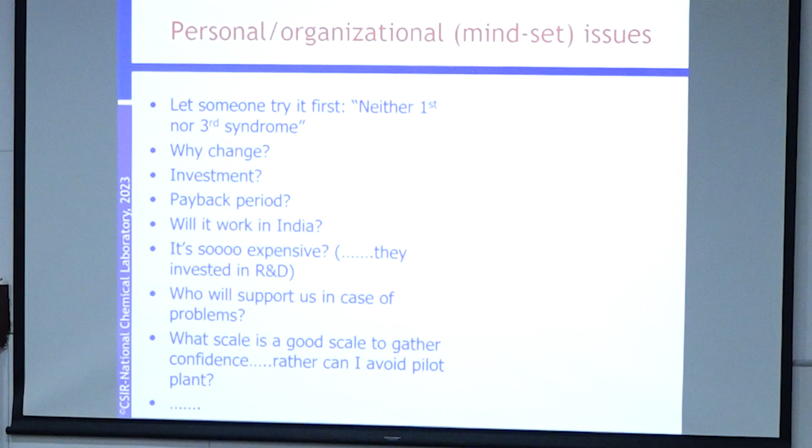My plants are already there, I am buying somebody else's reactors, I am using them, I can rent reactors and still make money out of that, and so on and so forth. So I think there are operational issues. Once you see such small systems working here or in NCL or anywhere, it will help change the mindset, because it will be for the long term.

Please realize that when you see the tip of the iceberg, a lot of effort goes below to make it happen, make it float. And so the time has come that if you want to sustain, we have to put efforts here, so that the iceberg still floats, still survives and does not vanish. So I was talking about all these four. I hope that I have addressed them properly. Let me come to the last two slides.

We have started the Center for Sustainable and Continuous Manufacturing at NCL. It is a joint effort, and this will be done through NCL, and there is a UK partner called Center for Process Innovations, where we have three kinds of partners: NCL government-funded founding partners, then technology partners and the beneficiaries. The plan is to reach out to more than 100 industries in the next 2 years who will adopt many of these things.

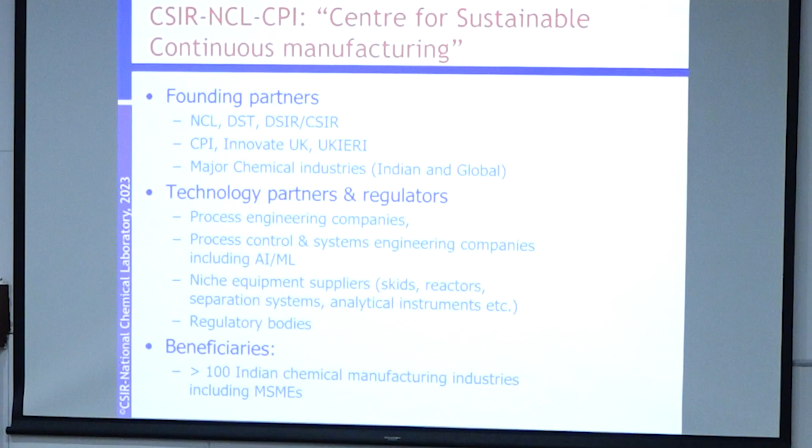We are creating separate buildings, separate facilities for that. We have already invested a lot of money, and we are creating a digital platform that will be like an open platform for people to ask for help, that yes, we have seen this is what has happened, what to do, and no agreements etc. will be needed through that. So a lot of things are going to change. You will hear from us on our website very soon about that.

Issues like carryover of the unreacted reactant, bypass, byproducts, etc., cannot be ignored, but good engineering and good understanding of reaction kinetics will always help. Heat requirement at each reaction step is different. So the general perception that chalta hai will not work, because once it is continuous, you cannot make changes.

But the same continuous plant can be used for many products. The hypothesis that I have one continuous plant I cannot use for anything else, that is wrong. If you know your reactions better, you can use the same plant for multiple products. Combination of different types of reactors is not uncommon.

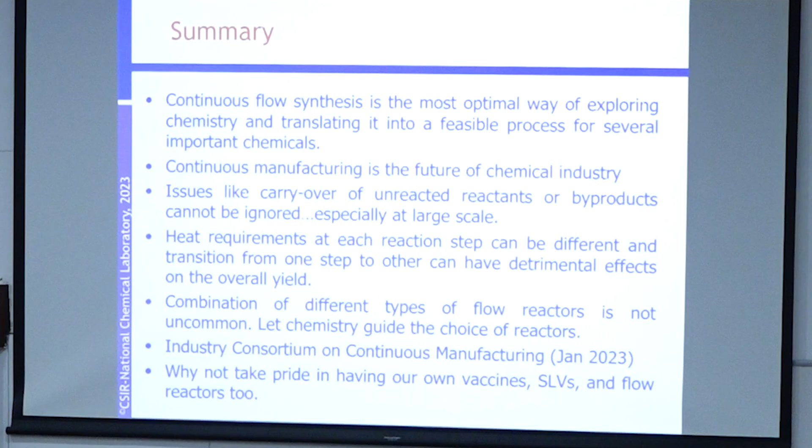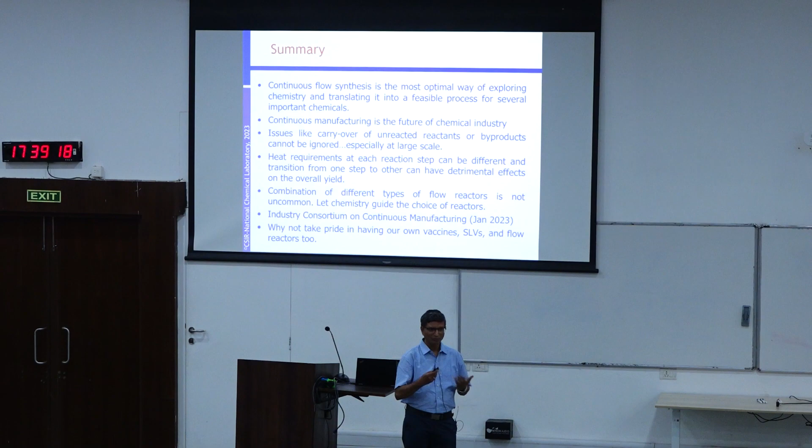So this consortium has already started gearing up, and when we take pride in having our own vaccines, our own satellite launch vehicles, our own other systems, why not have our own flow reactors and better processes also? It all depends on the end user industries, because if you do not use our own things, you will not be able to take pride in that. Thank you very much. This is my last slide.